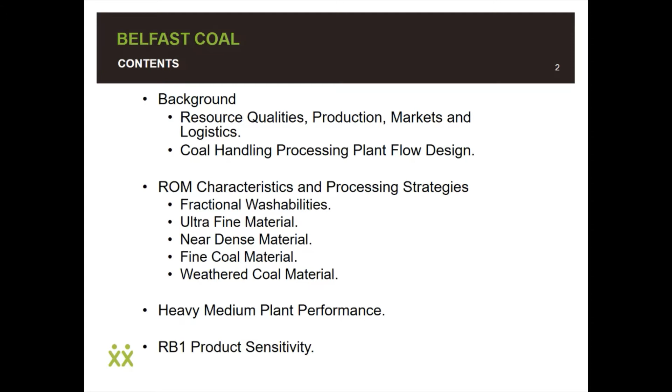The screen that's up shows the resource qualities. You'd see that our Seam 2 makes up about 90% of the resource, and its in situ quality sits at about plus minus 25 megajoules per kilogram. So if you ask me, if that is nice and dry, it's almost a B grade quality, or RB2. Then the rest is the Seam 3 and Seam 4 - Seam 3 in situ is almost Eskom quality, and Seam 4 will definitely need to be washed to actually make Eskom quality.

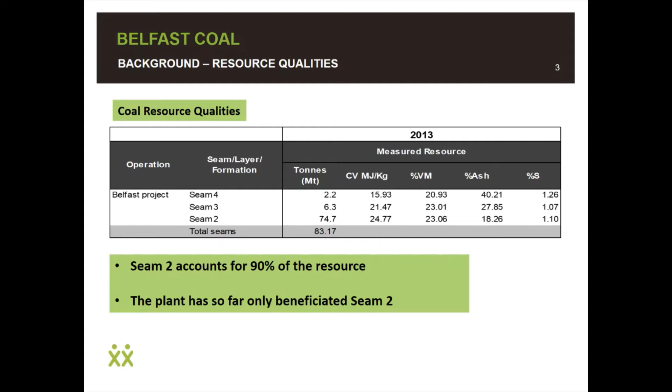The plant so far has only beneficiated Seam 2. The life of mine of this current plant is about 16 years to treat 3 million tons per annum of ROM. With Seam 2, it's a double stage process to produce a minimum of 5850, which we typically know as 6,000 kilocal per kilogram. Then the sinks from the first stage are reprocessed to produce middlings, which in our case is 4,800 kilocals. Both products are being exported. Now, when we see Seam 3 in future, the intent for that seam would be to produce just the middlings.

We have also currently built a new linear siding, which is about 30 kilometers from where the Belfast mine is. That's where we load trains to rail them to the RBCT.

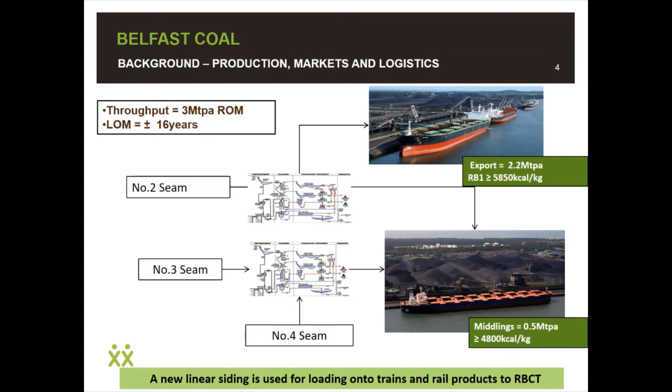Now, going on to the plant, we basically designed the plant to receive about 1.2 meters top size for ROM, which goes through a crushing and screening section. It's an open circuit type design where we produce minus 80 millimeters at 750 tons per hour. With that, we feed it into our buffer capacity of 2 silos, each about 7,500. From the silos, we control our feed to a maximum of about 500 tons per hour, which is fed into the low gravity dense medium, or heavy medium, circuit, where we screen out the -1, which goes into the fine section.

But for now, let me touch on the +1. The +1 is pump fed to a 1300 dense medium cyclone, where the floats from that cyclone are part of your export product quality, which is the coarse side of the export. Since it's sitting at -80 millimeters, we recrush it to -50 to produce export from the low gravity. Then the sinks from the low gravity cyclone are fed into the high gravity plant where we produce the middlings. The sinks of the high gravity plant are our discard. The floats, we also crush to -50 for top size control for the middlings product.

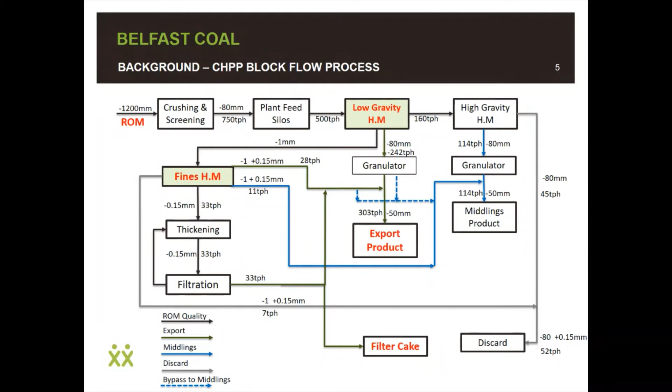Now, you would see that I have a lot of red on this slide, because I am definitely going to talk about ROM, touch base as well on the low gravity, spend some time on the fines DMS, and as well as the export product with the filter cake.

Just for understanding, this is our typical PSD, which goes into the respective streams. And for an idea as well, our design envelope for Seam 2 to Seam 4 is between 50 and 90%. So it's quite a wide envelope.

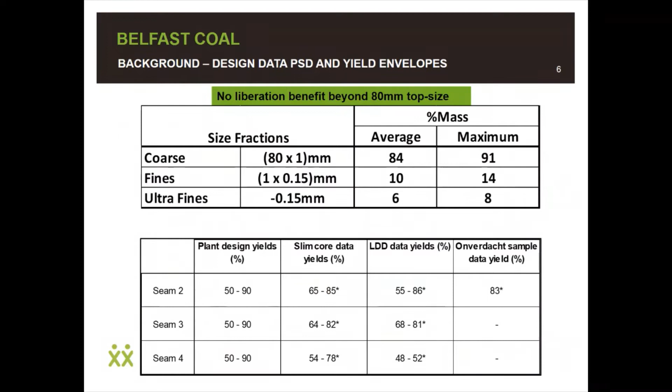Maybe someone is asking themselves, why do we really want to talk about the ROM? I must say, if you are trying to produce RB1 from the Belfast area where we're currently mining, and you sleep, you will definitely miss the spec. The ROM from this area is not forgiving at all. In other mines, they've got the luxury of blending pits and blocks from different areas, but in our case, if you're going to do that, you need to be very, very careful.

I've got this slide up to also take you back as to where we come from with this design. When we started the project, we had slim core data, which we used for our financial modeling and as the basis for our PFS, as well as the BFS.

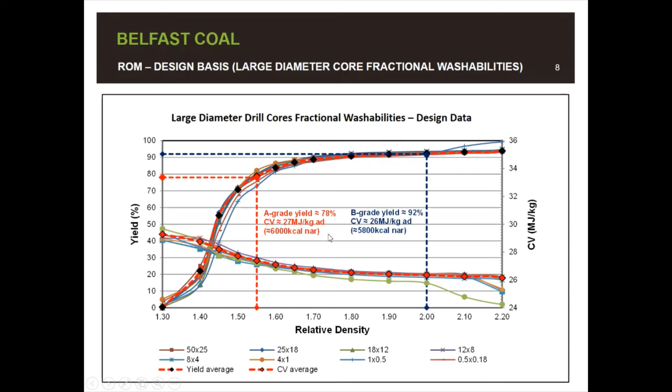You would see now that if you had made an assumption that your fines will behave as the coarse, you are actually completely wrong. So now that calls for more work. It means that your fines cut point cannot be the same as your coarse cut point.

We're lucky that the coarse fraction talks to the geodata, and it's slightly lower than the geodata, which accounts for geolosses, mining dilution, and contamination, because life can't just be perfect. But it at least talks to the geodata. So if you were only treating the coarse fraction of the ROM, you would perhaps discount by 10%, roughly, plus minus, and life can continue.

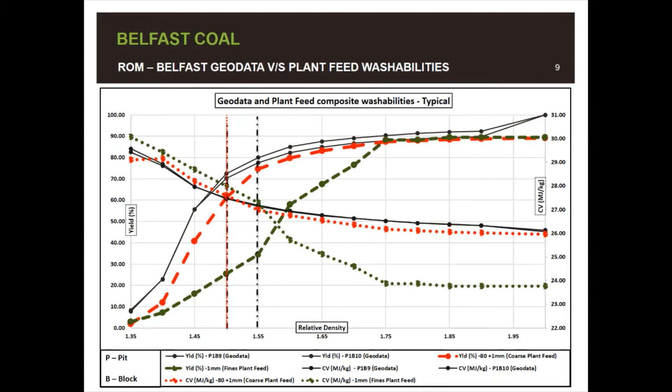So how do we deal with this? We had to relook at our pit analysis regimes. What we do now is occasionally or strategically pick specific samples within the pit which we crush to minus 80 millimeters to produce the PSD. With that, we do fractional washabilities as per the size splits of the plant, which is your minus 80 to 1, minus 1 to 150 microns, and your minus 150 microns. The top coarser fractions we do fractional washabilities; for the slimes, we just do proximate analysis.

Once you have this information, you have to decide what to do with the slimes, what your predicted cut point is, and what yield you should be expecting. I understand that in other mines, the geo model or geo data is adequate to make those calls, but in our case, not so much.

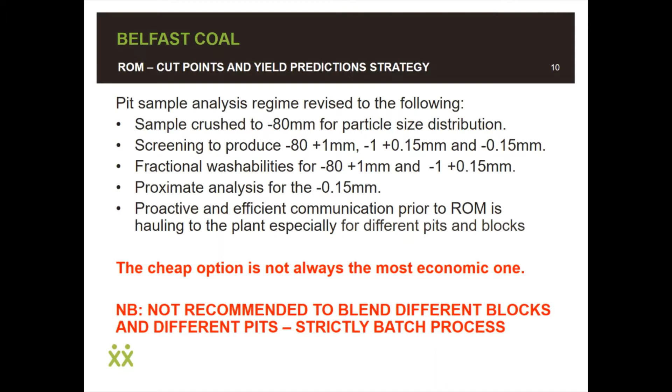So it's actually not recommended that you blend different blocks and different pits. It's strictly a batch process, unless there are similarities between those pits that you want to blend. If you're under pressure for production and you've got blends that don't talk to each other, the decision will be yours. You could make your tonnage to plant, but you might not make your yield, and your misplacement might be elevated to levels you don't want.

So after the sampling and analysis of the pit phase where we'd be mining at the time, we would use that to predict what total yield we should achieve in the plant.

We have in-house developed an MRM tool where we take those specific splits and plug them into the data input tab. With that, we're able to spew out for each plant where to cut, and also get proper guidance on what to do with the filter cake.

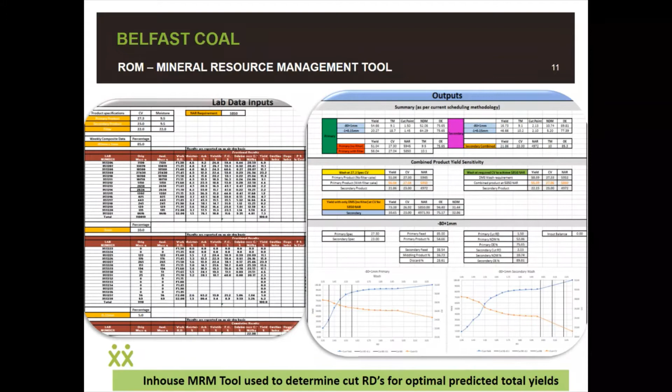Speaking of the filter cake, during the design it was an informed decision from all the sampling we've done. We made a call that the filter cake quality, or the slimes, would have the same qualities as the raw material, but we were proved otherwise.

You see the curves I have up, from this year, January until April. The green curve shows your ROM quality, and the bars simulate your filter cake qualities. It's evident that more than 90% of the time, the filter cake material is not the same as your ROM. It varies by 2 to 3 megajoules per kilogram from what your ROM would be.

With that, it actually makes it difficult for the times when your filter cake is extremely poor compared to the ROM, to be reblended into the RB1 and make spec comfortably. So with the MRM tool, we're able to determine what to do with the filter cake.

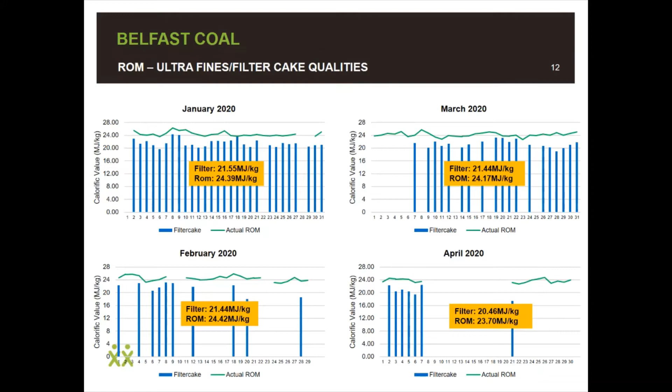Within our design, we had planned to blend it onto the export, which is the RB1, or throw it out as a standalone into our filter cake stockpile. What we're currently doing is mostly throwing our filter cake into the stockpile and selling it as a standalone. But there are times where the filter cake is close enough to be blended into the RB1, which is the first case, or what we'd like as an ideal condition.

Again, I made a point earlier that we have high near density material. We're expecting an average of about 40, but we're seeing peaks that go up to 70. What I have on screen, the top portion on the left, shows your near density percentage, and on the x-axis those codes represent the blocks we're mining. The red line shows the average we expected, and the dots show the peaks we see. You'd see from the top graph that your near density average is more above 40.

And that's where the washability curve is the steepest, and that's where you see your 70%. But now, if you don't want to blend the filter cake, what happens is it allows you to wash at slightly higher cut points, and with that, you avoid the near density region.

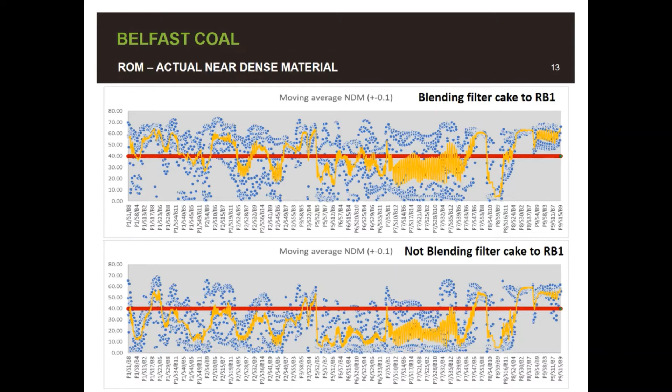To put that into numbers, I've got this table that I've put up here. It's basically the average of the life of mine for when you blend the filter cake and when you do not blend the filter cake. You'd see that if you blend the filter cake, initially we thought the filter cake would have a positive contribution to your RB1 yield, but actually that is not the case. If you do not blend your filter cake, the yield gain on RB1 from avoiding the near density zone is actually 10% more. So it's really not worth it to blend the filter cake onto the RB1.

It also does not just improve the yield, it also improves your organic efficiencies as well. You are able to wash slightly rougher, not as sweet as you would have if you wanted to blend the filter cake. You'd also see that shown within the weighted average DMS CV. With filter cake, you have to be sitting at about 27.4, but without the filter cake, you can actually wash slightly rougher and get a very good yield upside.

So you would ask yourself, now that we're planning to sell the filter cake at RB1 — obviously it's known in the industry that if you're going to sell it as a standalone, you're not going to make that much money. But the yield upside on the RB1, when you do not blend the filter cake, actually justifies that you should not do that. In fact, you should consider blending it either with your RB3 or your 4.8 material if you have that opportunity.

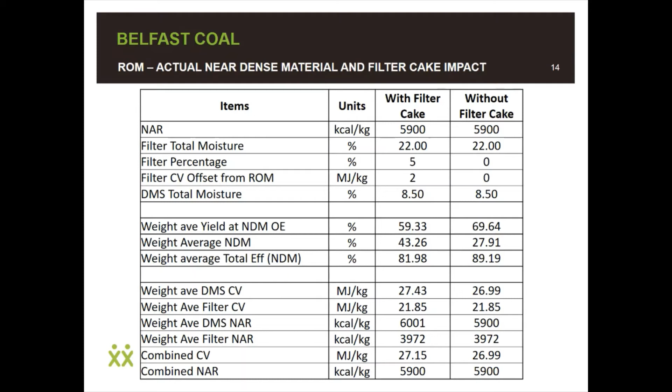Now, this near density is a definite pain. So what we've done during the design phase, we've allowed for a barrel within the cyclone, and we also opted for a large diameter cyclone because it's very forgiving if you want to achieve high medium-to-coal ratios. And again, it also allows you to have a slightly bigger spigot for a case where you have a higher percentage of sinks, then you don't have spigot loading.

And it just doesn't justify running the plant like that. So we are definitely running our plant at 12D at all times, unless we have prior information that we won't be receiving material with high near density. Then in those events, we would drop it to about 170 kPa without actually experiencing any misplacement. But that is only if you're not putting in high near density material. That also assists with the life of your equipment, because high pressures definitely compromise the life of your cyclones and your pump as well.

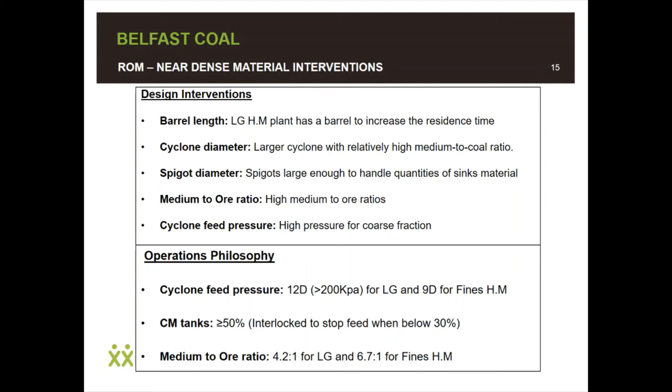Now, the other thing that we do is the medium-to-ore ratio. We've interlocked our tanks to 30%. If it goes below 30%, we actually want to trip the feed, because when that happens, you don't have enough medium to achieve the medium-to-ore ratios as stipulated of about 4.2 for the low gravity and 6.7 for the fines DMS. So our operating philosophy is to ensure that all our CM tanks are always above 50%, so that we have that cushion should it happen that we see near density material. We are not compromised when it comes to the medium-to-ore ratios.

So with that being said, the reserve cannot be blasted with a one size fits all approach. There are pockets which are hard enough and deserve a decent charge, and other pockets which can be freed up. So you need to know where you are within the reserves, or otherwise you're going to send powder to the plant. Our mining colleagues are working extensively on this issue to optimize and fully understand our reserve.

Now, why is this the issue? The low gravity cyclone, its breakaway size is about 7 to 10 millimeters. Now, if you look at the +1 to -10 fraction, if you're going to see about 40%, then you're definitely not going to win.

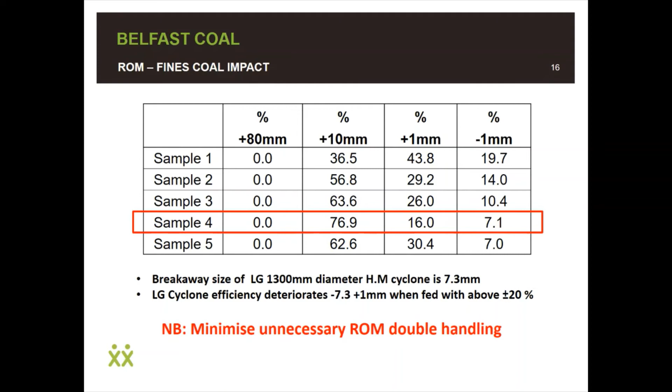The other issue that we've picked up in the area is that we have weathered material. There are pockets of weathered coal. So when we see that there's poor flocculation, then you get black water, there's increased fines content resulting in high magnetite losses, and also RB1 product misplacement.

Then with that, because it's fines, fines end up in the filter cake, then you have an increased tonnage of the filter cake, and your moisture content really goes south. You get a filter cake which is not really a cake, it looks like toothpaste.

Over and above that, your water pH actually also gets lower, then it becomes acidic, and you also have increased probability of blockages on key chutes. Of course, the blockage means the plant is not running.

So it is very important that there is clear communication between the plant colleagues, the mining colleagues, and geology, so that when we receive weathered material, we know beforehand, so that within the plant we are able to trickle feed it and blend it with similar type coal in terms of your cut points, and avoid having all these issues that I've just listed.

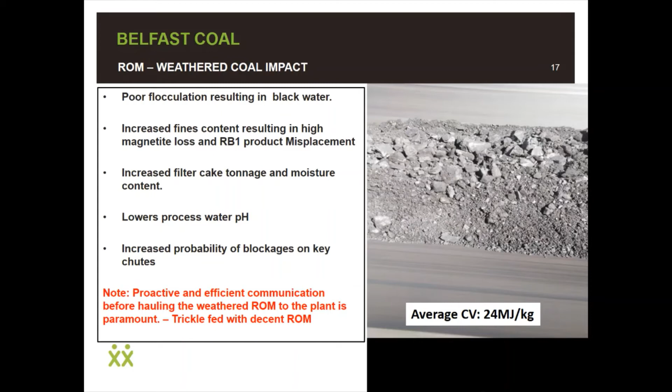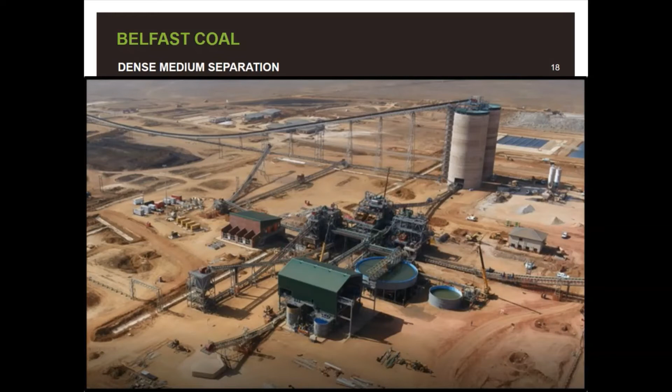You could see we've got 3 buildings: low gravity, high gravity, with a surge bin in between, and the fines DMS, thickening, and the filtration circuit.

The split, if you want to put it into tons per hour: for the low gravity it's about 420 tons per hour, fines about 50, slimes about 30 tons per hour.

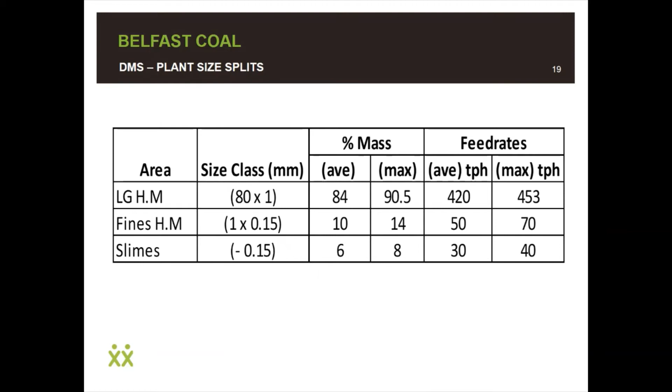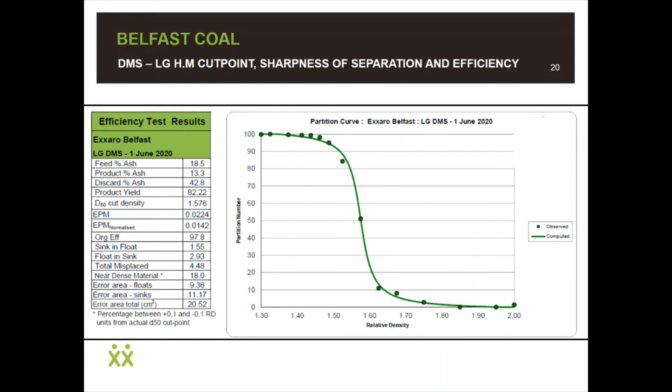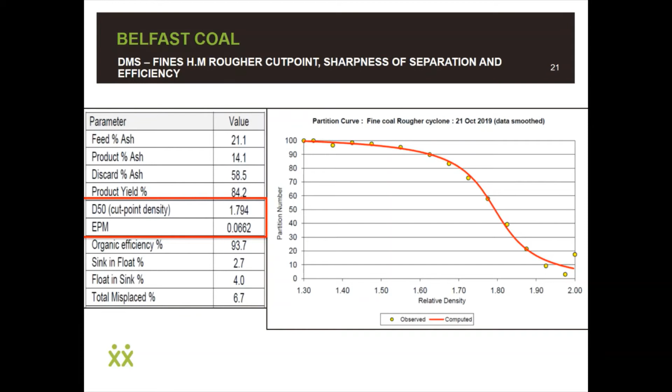If you go to the fines DMS plant, we are able to achieve a cut point of about 1.8 for the rougher cyclone with an EPM of about 0.06. On the cleaner, we are able to achieve a cut point of about 1.5 to split our RB1 product from the middlings.

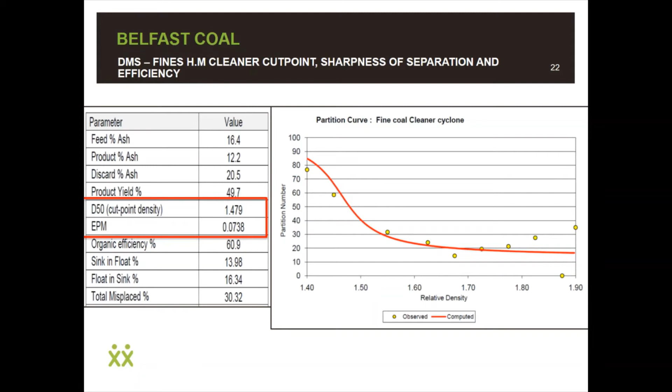Some learnings from the fines DMS, because it's a technology that's been there for many years, but it's not popular because of the magnetite losses that were high in the past. What we found with our design is that with the new generation mag seps, that issue has been sorted out. The magnetite consumption is actually very reasonable and is competitive with the other technologies that don't use magnetite.

The other lesson that we've learned, when we did the design, we sort of had the same size mag seps for the discard middlings and the RB1 mag seps. Because we have very high yields occasionally, your RB1 mag seps gets overloaded. We could have been better off if we were one size up with that mag sep.

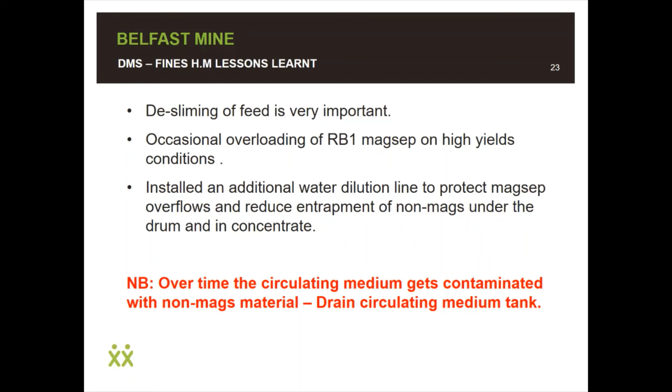So what we've learned is when your overdense is full of non-mags, then your medium stability basically doesn't exist, and your cyclone sort of becomes a splitter. So to sort out that issue, once a week we drain our CM tank of the fines DMS plant and put in fresh medium. What we've drained, we don't chuck it out, we send it to the coarse side of the plant, because at least there we've got densifiers. We can remove the non-mags from the medium and reuse the medium within the coarse section of the plant.

What we've achieved with the fines DMS, I must say, I was slightly worried, because wherever I went, people would ask me if I'm confident about this fines DMS during the design phase. I'm happy to announce that it was actually the right decision that we've taken to go with this technology, because it is able to do low cut points at very high near density material.

We've actually recently done a test work campaign to compare the fines DMS with the new LC3 spirals. The fine DMS still came out tops. But that is specifically for this case when you're producing RB1. If you're going to produce RB2, then the spirals would come out top, because there you are not sitting in the high near density material.

So the other thing is, since we've got high near density material, the cut point control is also critical. With the fine DMS, you are actually able to accurately control the cut point and minimize misplacement, which is something that we do not want. And the cut point density as well is approximately 0.2 units higher than the circulating medium.

What we're using for the fine DMS is the 85% minus 45 micron magnetite, and we found that to work well. Our current magnetite consumption is about 1.5 kilograms per feed ton. Still room for improvement there, but I'm happy to say this is within range and is within the design envelope. But there's one or two things that we're looking at to improve the magnetite consumption as well.

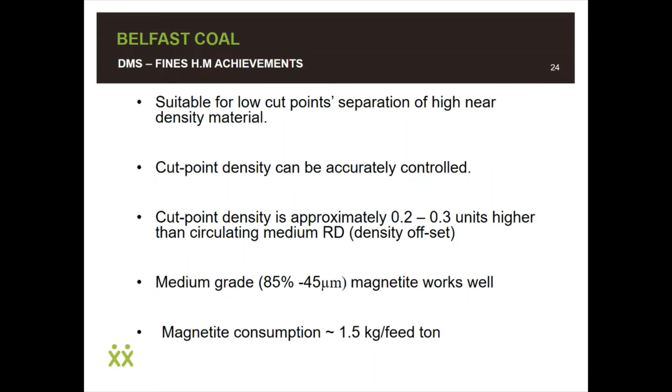Now I also want to talk very briefly about the RB1 product sensitivity. You see what I've circled in red. It's sitting at about 8.7% moisture. That was a train where the quality was 5873 kilocal.

What I want to bring attention to with this is that if that moisture was 9%, regardless of the ash content being 13%, the train was going to fail.

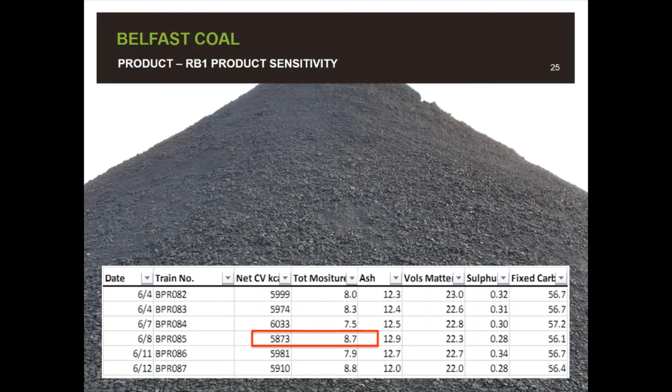So take note of that. The inherent moisture is very high. That means our de-watering is as important as our beneficiation, because you could be a rock star on the beneficiation side of things, but if you're not going to de-water the product properly, you might not make a spec on the train, just purely on moisture. That's how sensitive the material is this side.

Again, sampling and analysis accuracy, equipment accuracy is also extremely important, because if there's errors from the sampling, then when you get your data from RBCT, they will definitely tell you that you can't invoice that train as RB1, you'll have to invoice it as RB2 because you had errors within the sampling. So we pay attention to that.

And the rain, that is just one thing which we are at the mercy of the Most High with. So what happens is that you would produce at your optimal yields, and your dewatering equipment would be optimized. Then you'll have an in-spec product on the stockpile.

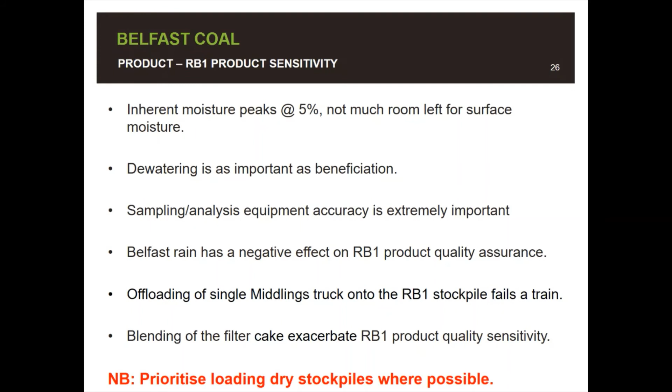Just some highlights at the tail end of this presentation. Just to remind you, something that we pride ourselves with is that we use the same ROM overland conveyor to return the discard into the discard area. So we call it a dual carry conveyor. We've commissioned that, and it has been working very, very well. So we pride ourselves with that. The advantages of that are obvious: reduction of discard hauling truck fleet, diesel, and footprint and distances as well.

We're also using the sizing technology, the latest, which is semi-mobile. Once we've advanced within the mining area, we'll be able to extend our conveyor to closer to where we'll be mining. And again, even on that, the benefits are obvious.

The last point is the fines DMS. We've got one at Leeuwpan, but it's currently not operating. We're using spirals. This is the only one which is fully integrated into the plant, so if the fines DMS is not running, the plant cannot run. And with that, we're actually very happy to report back that the fines DMS within the Belfast area is a success, provided you pay attention to the raw material. Only then you'll be able to make your product.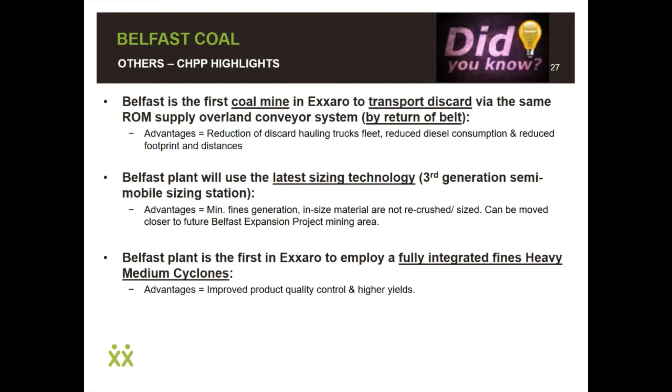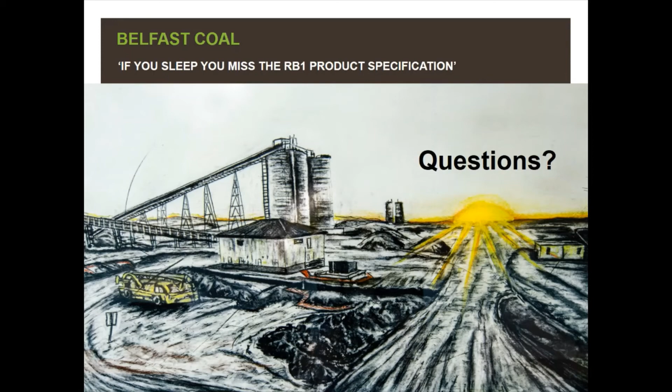How long was construction? Basically from start of construction up until first production. Thank you, Jason. I think it was about... so you say from start of construction to? Start of construction to your first coal, yeah. Okay, I think that was about plus minus 16 months. I don't know it from top of my head. It's been long, but it's plus minus 16 months. Okay, excellent.

Sipho, one more question. I'm just getting to that right now. A question from Anonymous: the coal industry has always struggled with fines DMS processing. What lessons were taken from the historical experience to get it right at Belfast?

Okay, thank you for that question, Jason. I think it's the obvious.

The only reason the fines DMS was not working out was because of the high magnetite consumption. Once the new generation SACPS was introduced, we were able to solve that issue by improving the magnetite recovery. Only now are we actually able to run that plant with very low OPEX and realize the end goal. That was the main lesson learned from the past. Without the SACPS, it's definitely not a winner. So the SACPS actually enabled this technology to be used for fine coal processing. Thank you.